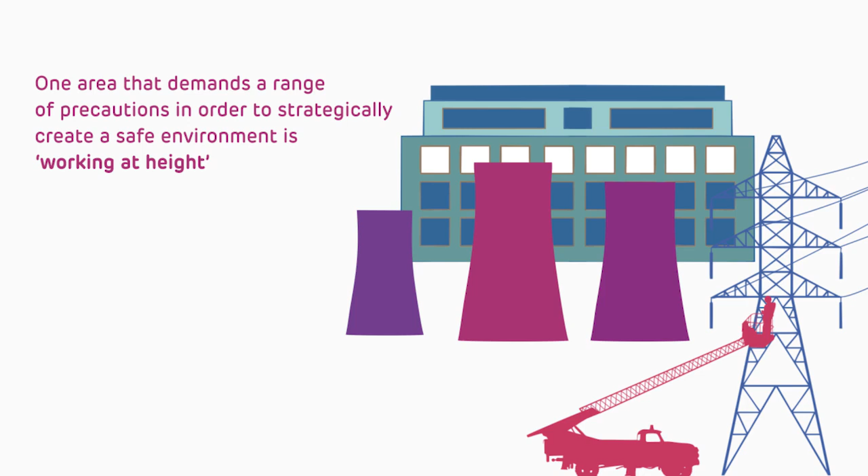Adani Power Limited, in collaboration with Messrs. Dupont, has embarked on a safety culture transformation project, Chetna. As part of Project Chetna, certain standards that describe the principles used to protect employees from the hazards of working at heights are set. These standards will help provide a new impetus towards establishing best-in-class safety systems.

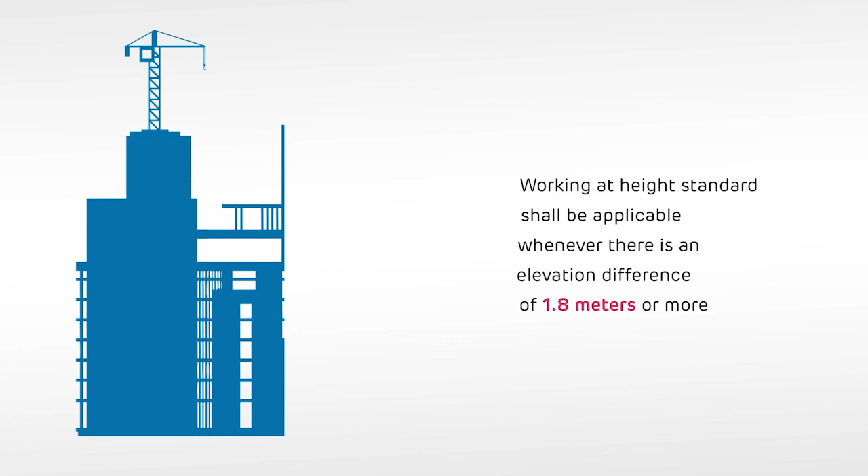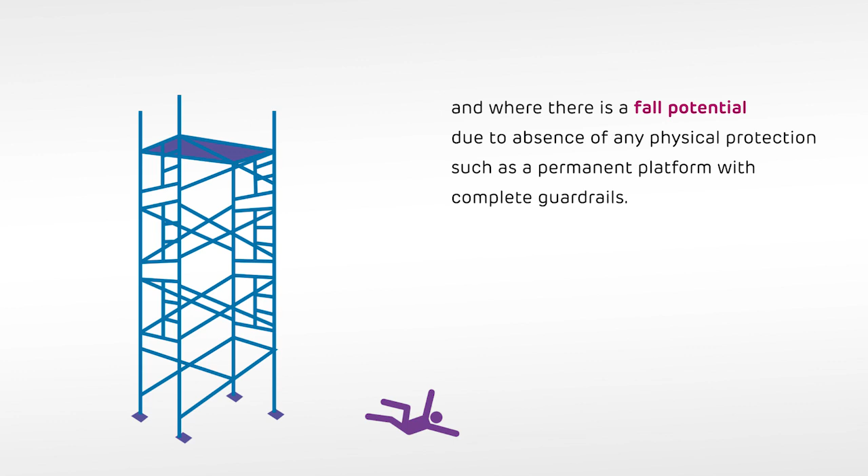Working at height standard shall be applicable whenever there is an elevation difference of 1.8 meters or more, and where there is a fall potential due to absence of any physical protection, such as a permanent platform with complete guardrails.

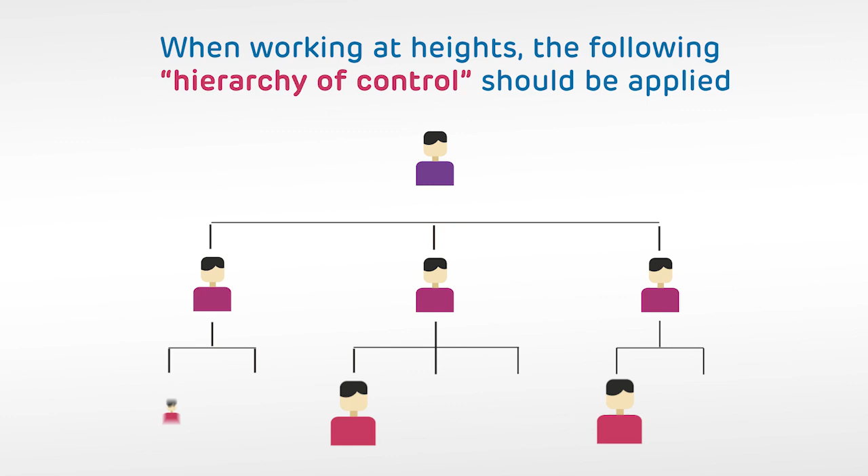Principles of working at heights. When working at heights, the following hierarchy of control should be applied: eliminate the work at height hazards, reduce the risks to an acceptable level, and use other required personal protective equipment or PPE, like a full body safety harness.

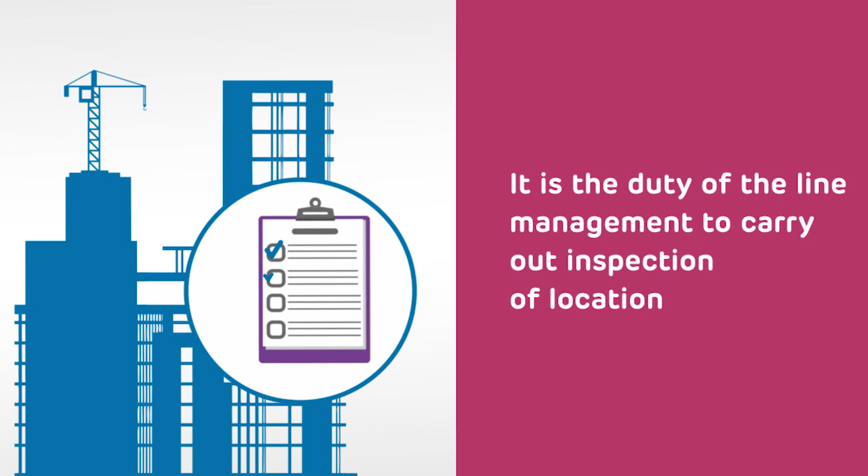Steps to be followed for working at height. Identification of hazards and risk assessment: it is the duty of the line management to carry out inspection of location to identify hazards, including specific location constraints. Based on this, resources shall be allocated and responsibilities for safety during work at height shall be assigned.

Planning and preparation of the task and rescue in case of a contingency. Based on the risk assessment, the team shall mobilize fall arrest systems, other equipment and manpower, and shall also ensure that appropriate rescue equipment, team and plan are in place.

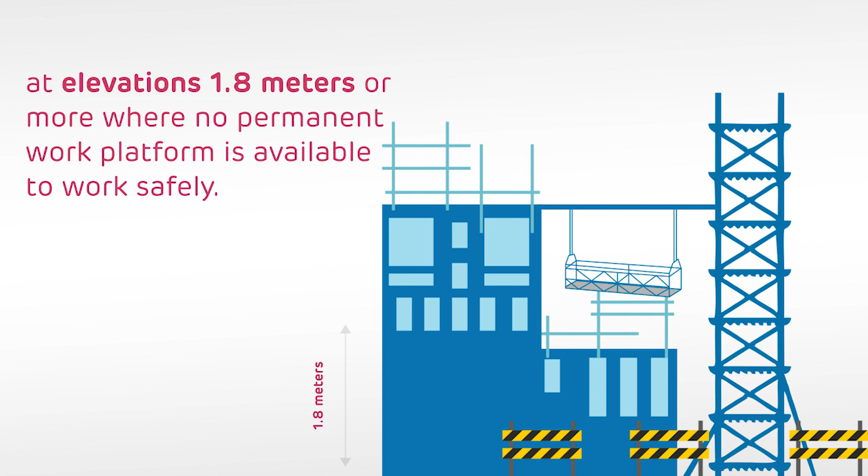Proper scaffolds or temporary work platforms along with guardrails shall be provided for working at height at elevations 1.8 meters or more, where no permanent work platform is available to work safely. Makeshift arrangements like drums, barrels, chairs and rope ladders shall not be used.

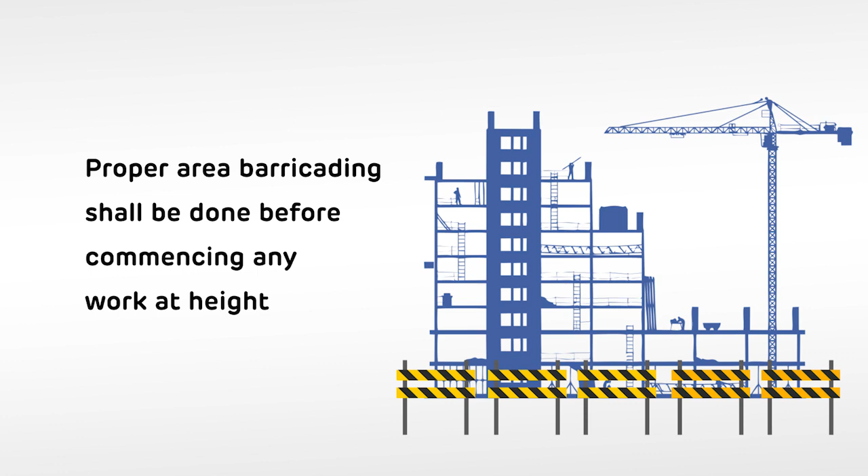Proper area barricading shall be done before commencing any work at height. If barricading is not possible, a safety net shall be provided and work-in-progress boards shall be displayed.

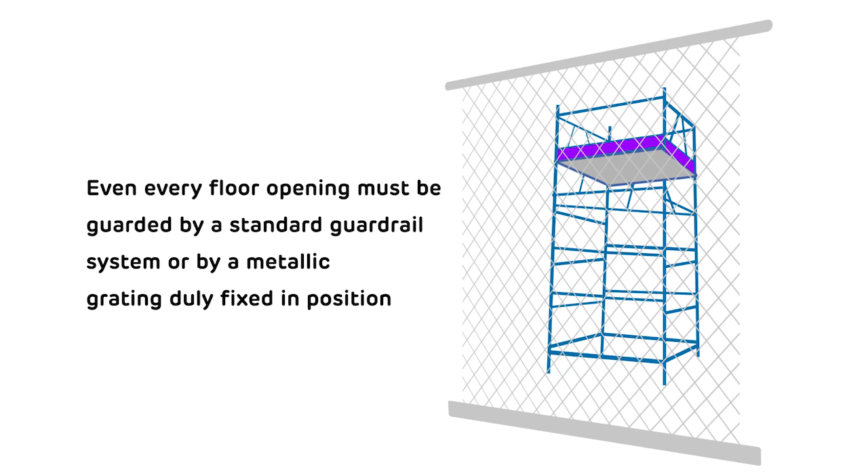Allocation of protective equipment. Guardrail system: installation of an appropriate guardrail system with toe boards around the work area is required for fall protection. Also, every floor opening must be guarded by a standard guardrail system or by a metallic grating duly fixed in position. Fall arrest systems: a fall arrest system is a full body harness with double lanyard.

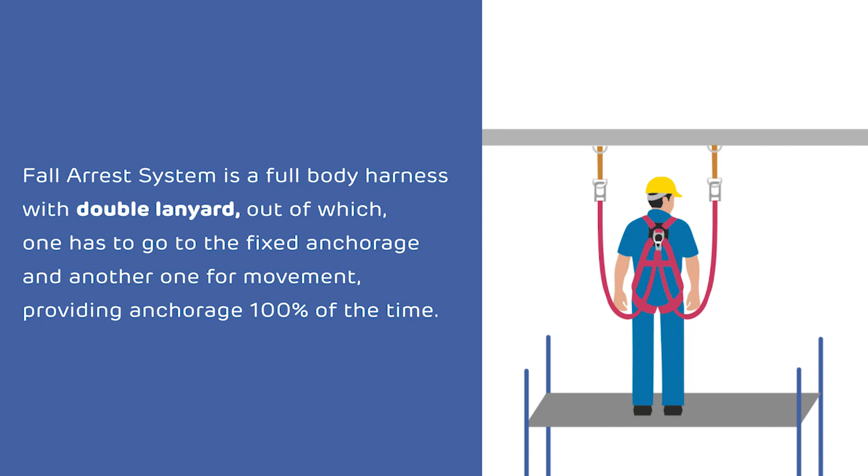One lanyard has to go to the fixed anchorage and another is left free for movement, providing anchorage 100% of the time. Self-retractable lifelines, or SRL, are a method of providing vertical lifelines for ladders, scaffolds, etc. Safety nets are to be provided for protecting people below from human fall and material fall. However, safety nets alone shall not be used as a fall protection system.

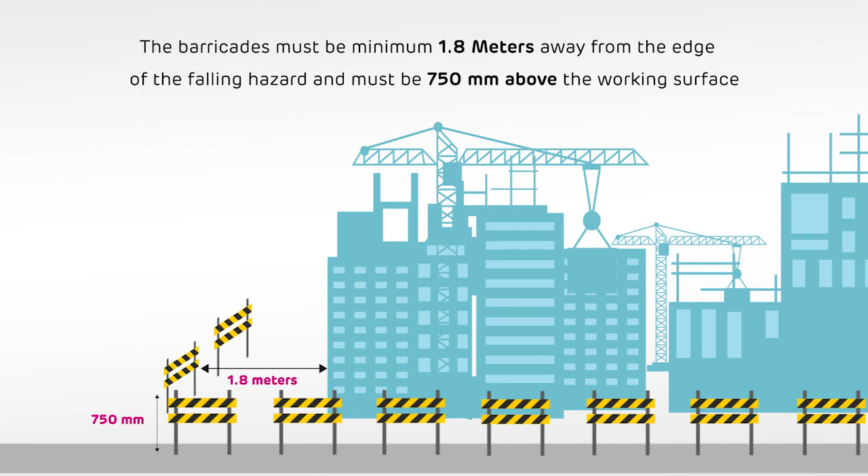Barricading or warning line systems. Cautionary barricades: the barricades must be minimum 1.8 meters away from the edge of the falling hazard and must be 750 mm above the working surface.

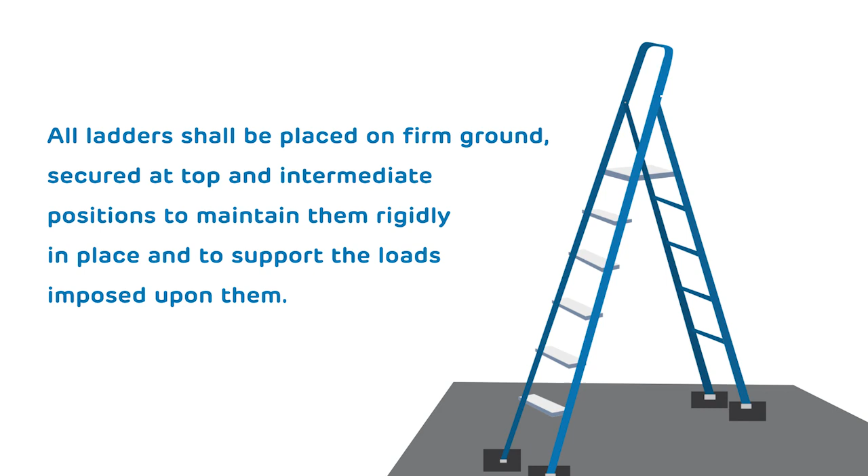Step ladders: if working on a step ladder with height 1.8 meters or higher above the floor, fall protection equipment shall be used. Insulated ladders should be used for working on electrical equipment. All ladders shall be placed on firm ground, secured at top and intermediate positions to maintain them rigidly in place and to support the loads imposed upon them.

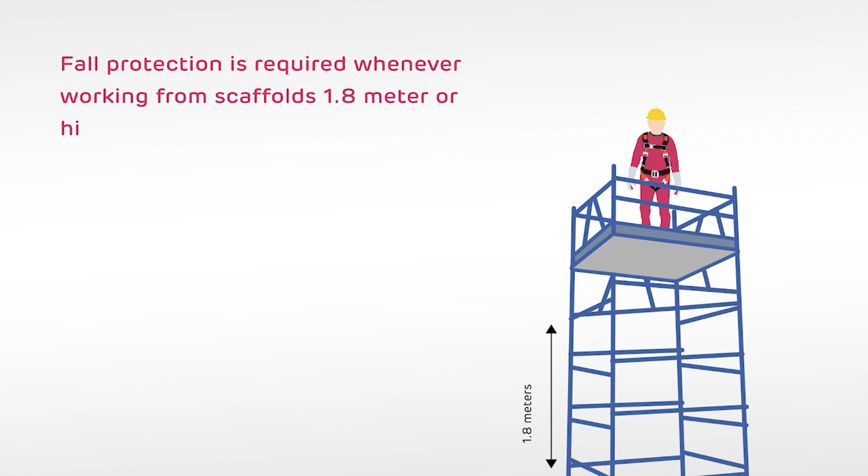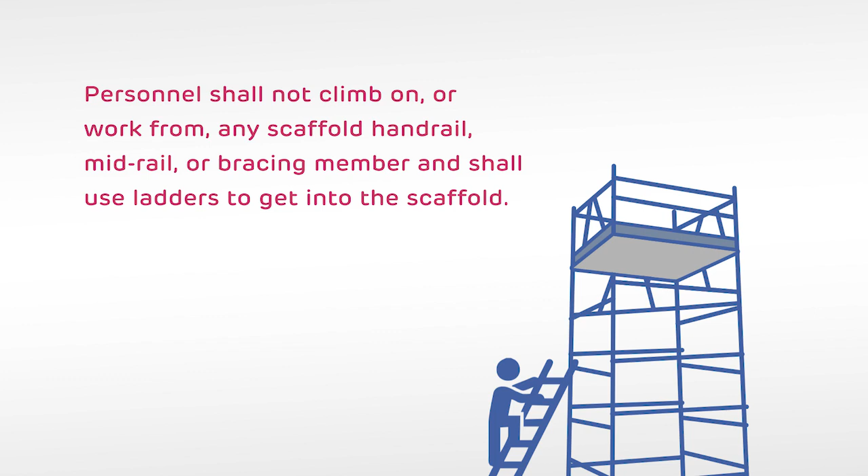Scaffolds: fall protection is required whenever working from scaffolds 1.8 meters or higher above the ground or floor level that have incomplete standard handrails or midrails, or are not completely decked. Personnel shall not climb on or work from any scaffold handrail, midrail or bracing member, and shall use ladders to get into the scaffold. Proper fall protections shall be used while building scaffolds.

Authorization and execution. Working at height must be authorized through a work permit for all activities. Prior to authorization, it must be verified that the person or persons engaged in the work at height activity are medically fit and do not have vertigo, height phobia, or any other illness which makes them unsuitable for working at height.

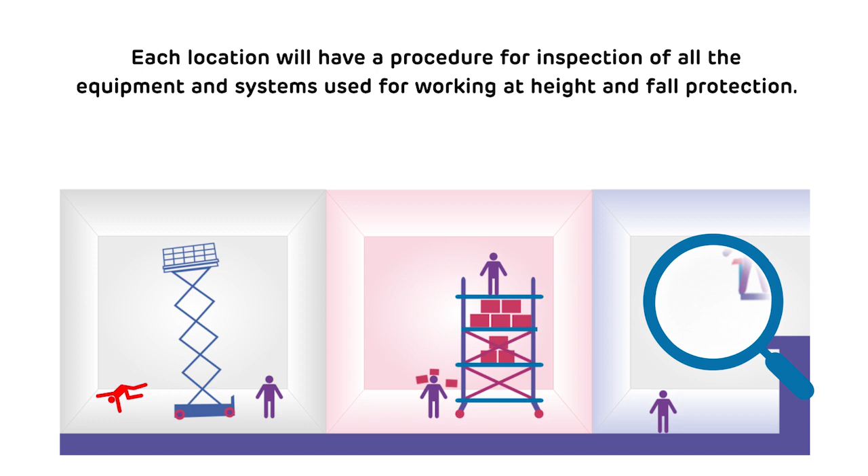Inspection requirements: each location will have a procedure for inspection of all equipment and systems used for working at height and fall protection, training and certification. All personnel who work at height must be given practical training on the use of fall protection systems.

Working at height has a lot of inherent risks, and it is imperative that this standard be followed to eliminate these risks. While compromising on workplace safety, it would do well to think of what is at stake, of the price one would have to pay for the little time that is saved.